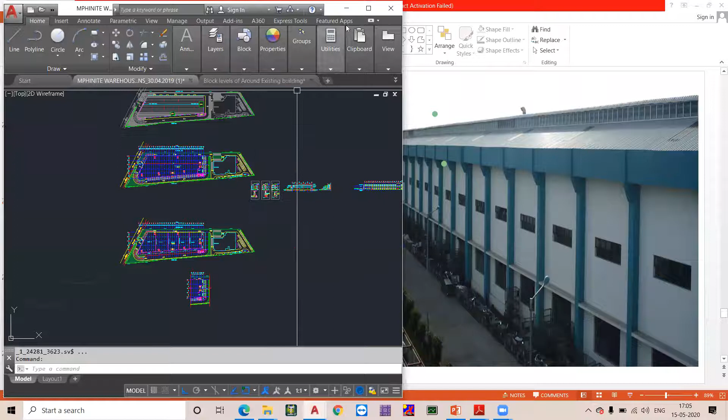And this is the floor plan. There is a KIADB road. This is an industry happening somewhere in the Bidadi industrial area, near Bidadi. Okay. And from the KIADB road, you are taking access to the entry gate of the property. You will be having 2 ramps dedicated for entry and exit. And this will be the space in the ground floor where you will be having n number of activities inside for the purpose of industrial usage.

And usually in the industrial buildings, guys, ground floor will be predominantly used for machineries if they are supposed to use them, and also for the purpose of warehousing, and for any office space kind of thing they will be going for the mezzanine kind of level. See there, this being the section in this architectural plan, this being the ground floor. The ground floor of all industries will be predominantly used for machineries, also for the purpose of warehousing, depending upon their requirement.

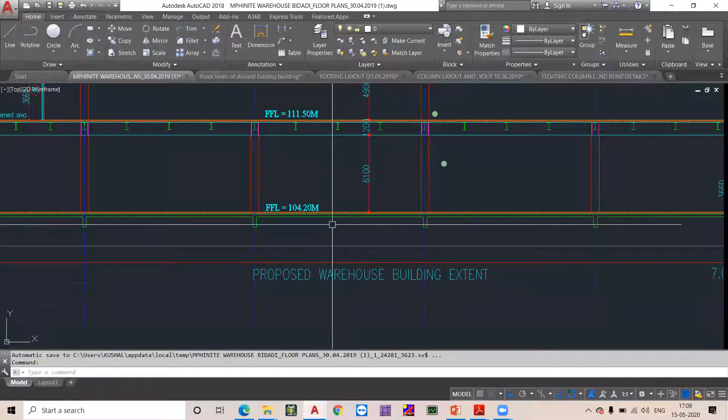Whereas the office spaces will be located in the mezzanine level, in the upper levels, because of resting or supporting heavier loading in the suspended system. Here in the upper levels, you will not be having any soil underneath to substantially sustain or support this slab. If it were the case on the ground floor, beneath the ground floor there will be well compacted earth. Having said that, it will be much easier to support heavier loads with this supporting system. Hence, in most of the industries, the ground floors will be predominantly used for machineries or for warehousing.

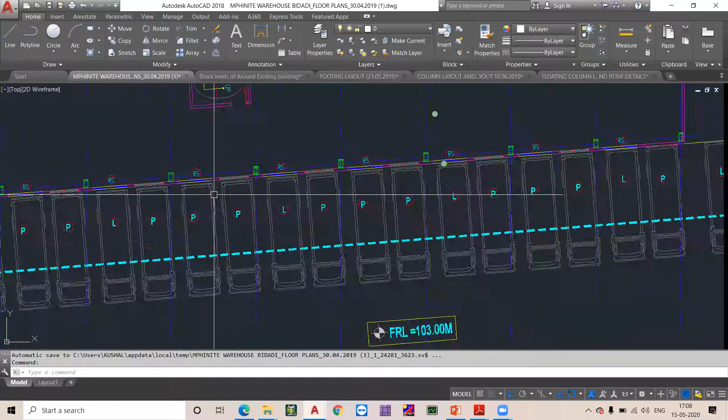Having said that, machineries and warehousing will come with very heavy loads, and it has to be transported in and out with the help of heavy trucks. Okay. And guys, you will be having an individual bay for each and every truck. This nomenclature called RS will be the abbreviation for rolling shutters. For this entire warehouse, this area will be termed as docking area, where loading and unloading of the raw materials or finished items from the industry will happen.

Both the raw materials that are coming into the industry will be unloaded here, and the finished goods from the industry will be again loaded back to the trucks. So this is how the arrangement will be, and this area will be termed as loading docks. Okay, and also you will be provisioning sufficient number of staircases and lifts for the vertical circulation system. And this being the activity in the ground floor, as we discussed, the office spaces for the industrial usage will be in the upper levels, dedicated for office works.

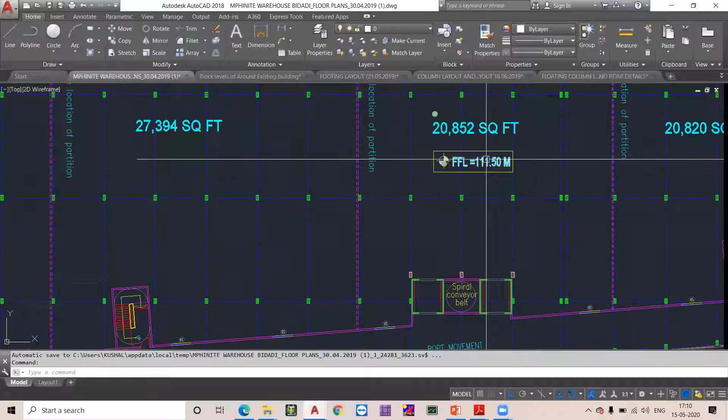Okay, guys, here we had a challenge that there was a lake very next to this property. Very next to this property there was an existing lake, and hence we will have to be retaining this portion of earth, and also this level being 106 meters at the entrance, we are raising the insides to 111.5, that is almost around 5.5 meters level is raised. The insides of this industry will be raised to a height of 5.5 meters, considering all the runoff issues and flood water collected during the entire year. They have considered to raise the insides to the level of 111.5 meters. Thereby you are filling the insides by 5.5 meters.

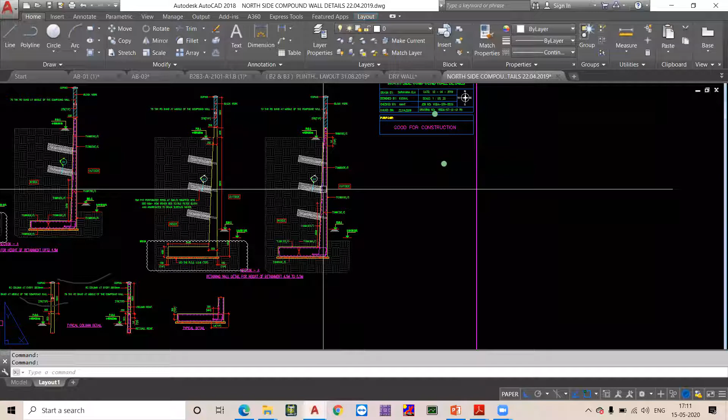Now that filling has to be retained. Okay, that soil has to be retained, and on the other side you are having an existing lake. This being the issue, we were supposed to design the retaining walls for supporting the compound wall to a height up to 5.5 meters. Okay, guys, this is a very massive retaining wall. So far, usually in the basements you will be having the floor to floor height of 3.6 meters, and that too there the situation will be such that there will be a slab of ground floor.

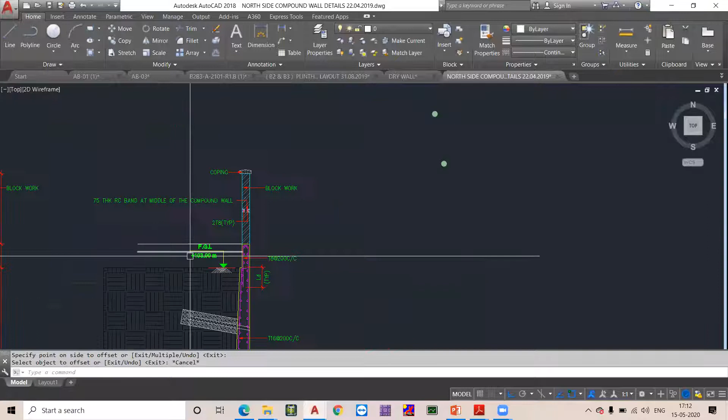In residential buildings, if you are accessing the basement for vehicular parking, then there will be a slab connected or tied to this retaining wall. Thereby the behavior will be a propped cantilever system.

But this retaining wall is being done in the periphery, at the property line edge of the plot area, in the plot line. Then this retaining wall will have no prop in the horizontal direction, and hence this is a pure cantilevered retaining wall spanning a height of 5.5 meters. So this is a very massive retaining wall we have employed in this project.

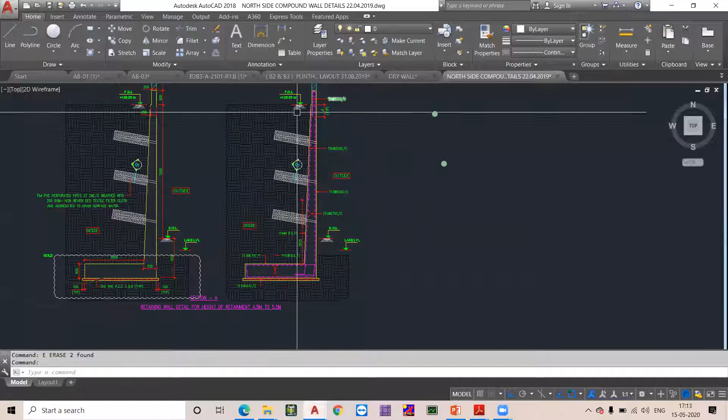And also, in order to reduce the loading, this side being the natural lake, we can drain out the groundwater that can be percolated inside with the help of provisions like weep holes. We will be provisioning a weep hole system through which the rainwater or any sort of water that can get percolated inside can be drained off into the outside lake.

Guys, having said that, we can only provision such weep holes towards this side just because we are having a lake. On this side there is a village, or it's the property of somebody else, and we cannot simply drain the water into his property. We cannot employ these everywhere. If this is somebody else's property, he will not accept me draining the rainwater into his property. So we cannot have the provision of weep holes everywhere.

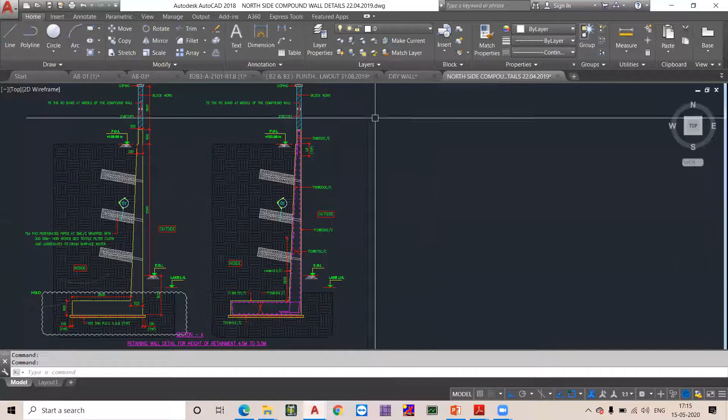The only luck here is that there is a natural lake, and hence we are draining out the percolated water into the natural lake. Thereby the density of earth will be much lesser than the saturated density, and you are reducing the loading on this retaining wall. So to take advantage and reduce the loading, we are provisioning the weep holes with a lake positioned outside. If this were somebody else's property, we would not be supposed to drain out the water through the provision of weep holes.

Moving forward, if this is a situation in a basement, how will it be? Outside of the basement there will be the filled up or natural soil. Inside you will be having car parks, driveways, some habitable areas. If you provide weep holes in basements, you are encouraging a threat. You are inviting the groundwater inside your basement, which is totally not desirable.

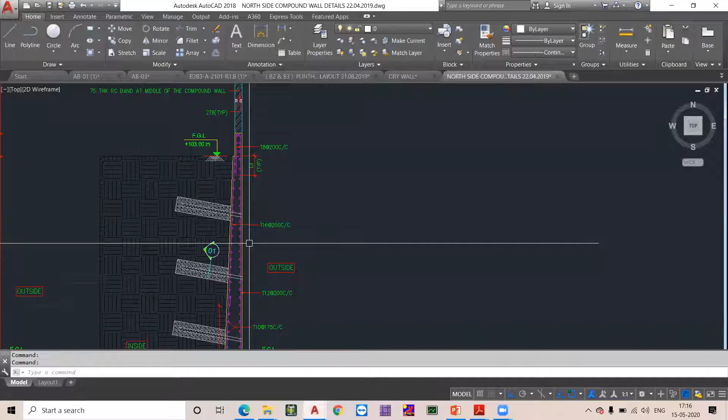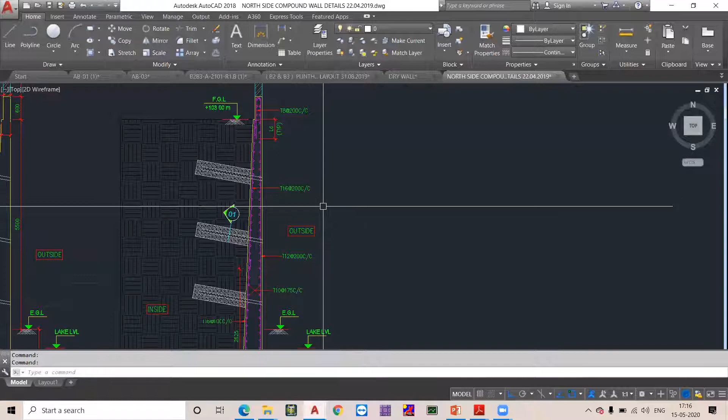So whenever you are making use of such weep holes, you will have to be very careful. If you make provision of weep holes in basements, it is as good as inviting the danger, inviting the outside water into your property, which is not at all desirable. And again, even if this is a property line retaining wall and instead of a lake you have somebody else's property, you cannot provision the weep holes and let in the water. This is one key issue I wanted to discuss with you guys.

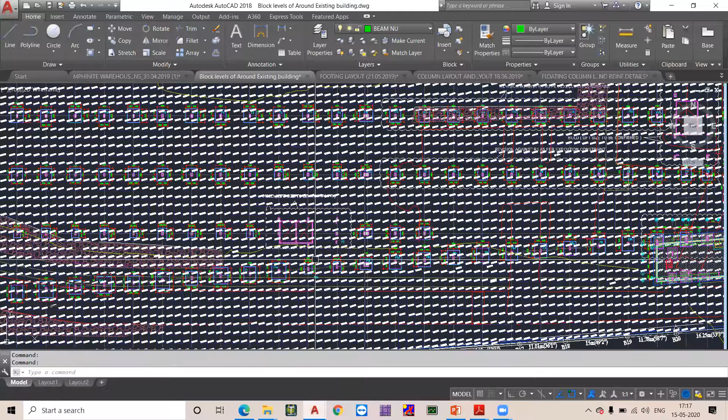Moving forward, the contour of this site is such that the existing ground level towards one end is 99.314 RL, whereas here it is 102.6. One side the level is 102.6, and towards the opposite end it is 99.3. On average we are having a 3.3 meter level difference in the topographical profile of this site. So this is the existing level of this property.

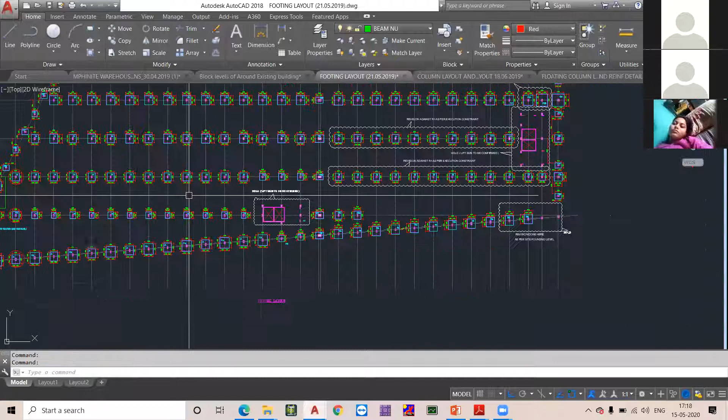Now the inside level you are looking at is 101.5 meters, so you are raising the inside very high. Moving forward, if you notice the footings of this project, even though the spans and loadings on each column are almost the same, as you go towards the depressed area of this property, there is an increase in footing area. This is a structural drawing, the footing layout for these columns.

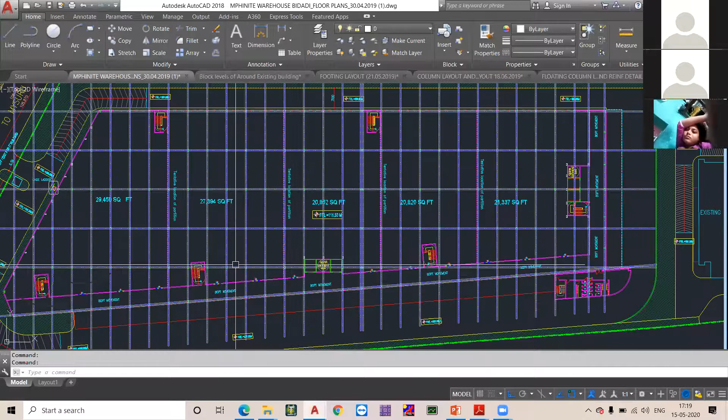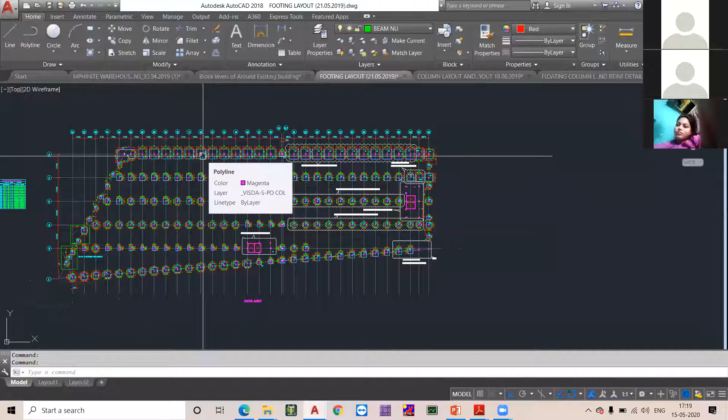These are all the columns, structural columns considered for supporting this structure. And you can notice the footing area is very high compared to the footing area at the other end, because there is a level difference of almost 3 meters from one end to the other end. Okay, and because of this level difference,

see, in structures like PEBs, okay, this is the steel drawing of the PEB, where the entire building will be made of structural steel, and all of these are positions of columns, structural columns. In structures like PEB, it is not a gravity governed structure. If it is the case of RCC, the structure will be governed by gravity. But since these are steel structures, lightweight structures, here it is not a gravity governed structure.

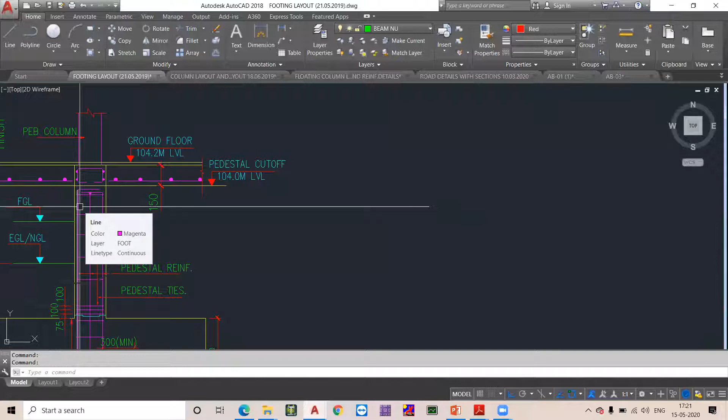That means the vertical load will be comparatively lesser with respect to an RCC building than your horizontal loads. Having said that, the horizontal loads at the base of the column are created because of the wind loading on the structure. In lightweight structures like steel structures, wind loading will be a very important criterion, because there will not be much activity on the roof. Since it is lightweight steel, it is not set for regular access. Only for maintenance activity will people be moving on the structure.

If you can notice, this is that section. You have steel columns, and this is your sloped roof at the top. This is the sloped roof, lightweight roof. Here, this is not a terrace. This is just a roof. This will not act as a floor. No access will be given for regular usage. The access will be only for maintenance activity. Okay. Hence, the live load on this roof will be very less.

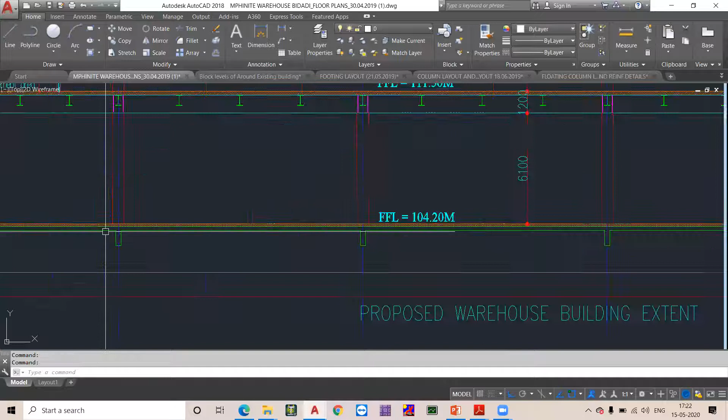With all of these parameters, the load transferred to the base of each column will be lesser compared to that of RCC. In addition to the live loads, there is a very huge reduction in the self weight of the structure too. The self weight of an RCC structure will be very massive, because the density of concrete is high, and the volume of concrete will also be high in RCC structures. But in steel structures, though the density is higher, the volume will be very less, and hence the self weight of the steel structure will be very less compared to that of RCC.

And also, since this is lightweight roofing, you will not be giving access, and no regular live load will be there on such steel structures. Adding it all together, the vertical load, the gravity load, will be very less in steel structures. But since this is a very light structure, it is prone to movement with the application of wind load, and hence you can notice there will be movement in the lateral direction of this structure. To arrest that lateral movement, a horizontal reaction force is generated.

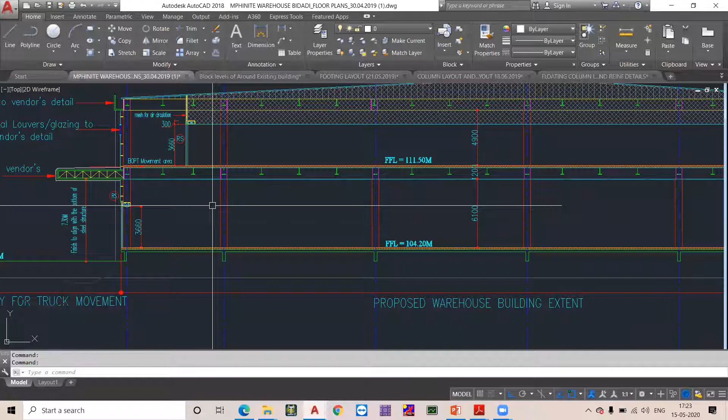If this had been a regular RCC case, the gravity of the structure itself would be so heavy that wind loading would not be a concern at all. The vertical loading itself would be so high that there wouldn't be any requirement of horizontal reaction generation at the base of the column. So we can expect a good amount of horizontal reaction in steel structures to arrest the lateral movement, compared to RCC structures. And hence, there will be generation of horizontal force in the steel column.

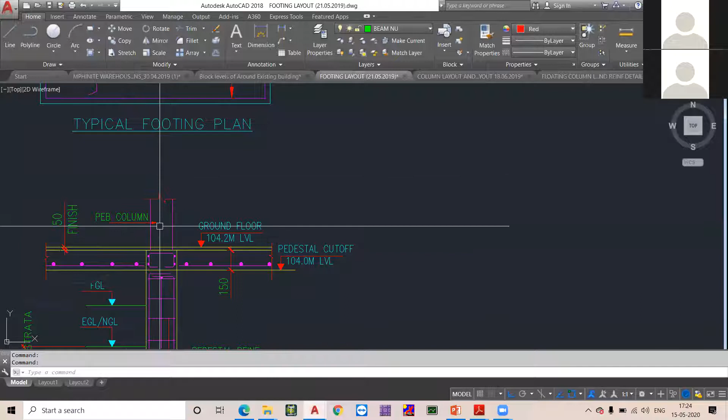This is the bottom of the steel column, whereas inside the soil, till it reaches the foundation, we will be providing an RCC column, which we also term a pedestal. The supporting system for this will be a regular RCC footing with RC columns or pedestals up to ground floor level, and above ground floor level it will be all steel columns, steel beams, steel roofing and such things. The lightweight structure will be above ground floor level, and below ground floor level it will be RCC.

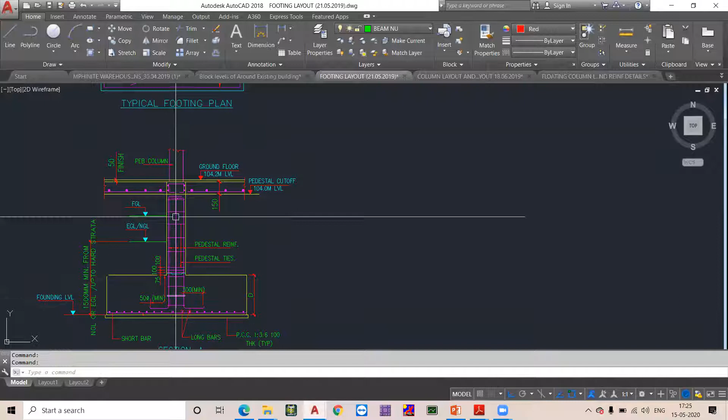Okay. At ground floor level the steel column starts, and the RCC pedestal or column stops. At this junction, we can anticipate the reaction developing for the steel columns in the horizontal direction to resist the horizontal movement anticipated due to wind loads. See, this horizontal reaction force, consider this as the wind load on the structure. And to counter this wind load, there will be an equal and opposite reaction developed in the base of this column.

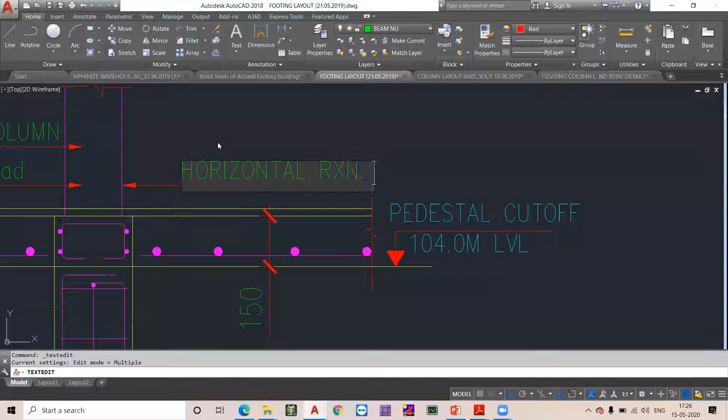This will be the horizontal reaction force that will be generated to counter the applied wind load. And this horizontal reaction multiplied by this dimension till the top of the footing, the product of this horizontal force with the top of the footing, we term it as a moment. This horizontal reaction force generates a moment at the bottom of your RCC column. Okay, and this moment has to be borne by this footing.

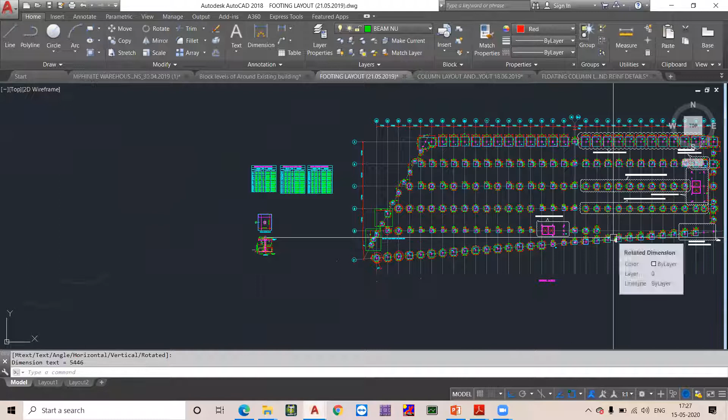See, in some places this dimension is just 3 meters or 2.5 meters in this grid. As you go towards grid A, the depth of founding level will be increasing, and from 3 meters it keeps on increasing to 5.5 meters. There, in these locations, the moment developed in this junction is horizontal force into 5.5. At the same time, in this grid, the moment developed is horizontal force into 2.5.

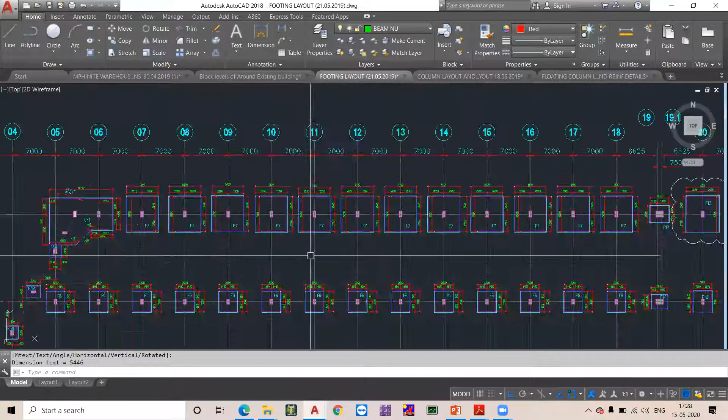So this is the reason why even after maintaining the same grids, the same center to center spacing of the columns, and same application of load, we can notice an increase in the footing dimensions. The reason behind that is the increase in the length of this lever arm.

Okay, this is one of the questions raised by the site team when I was handling this project, and hence to give you a fair idea: usually people at the site level will be technical persons, civil engineering graduates, but not necessarily structural engineers or structural designers. And this is how these designs will be done by the structural engineers. And this is the fundamental structural information they need to have at the site level, in case there is abnormal dimensioning.

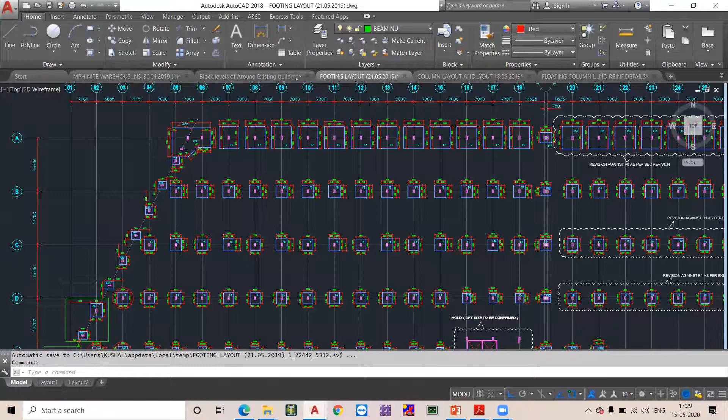See, sometimes, due to a drafting error, the draftsman may execute the drafting of this foundation dimension in grid A and the heavier foundation dimensions in grid F. Chances of drafting errors may happen. So in such scenarios, you should be in the position to identify that if the lever arm is increased, obviously the footing dimension should also increase. So these are some inputs the persons at the site level need to have when looking at the foundation drawing of industrial buildings.

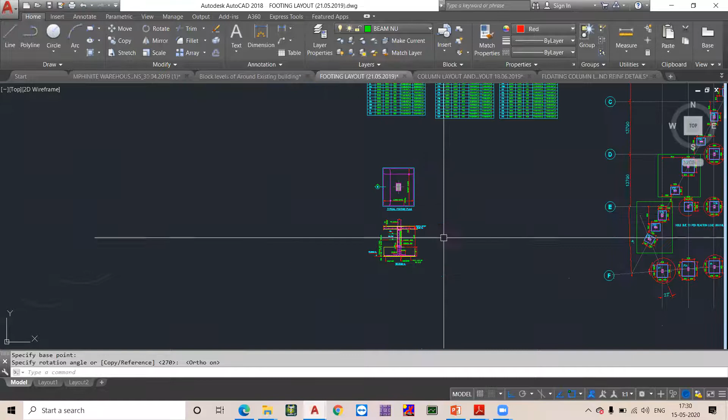And this inference you cannot make in regular residential or commercial buildings, where it will be mostly RCC. There, this horizontal force will not be a criterion, because in RCC structures, the major criterion will be your vertical force. In RCC structures, the gravity load is a very big criterion. This will be the gravity load. This will be the governing load in RCC structures, and the reaction will be opposite to it.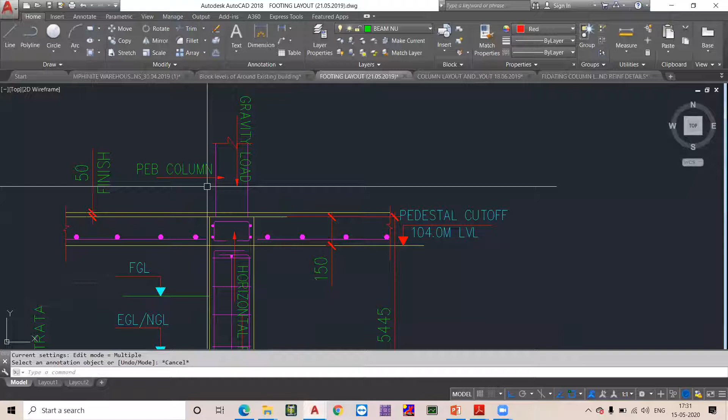But in steel structures, the governing load will be your wind, because they will be lightweight steel structures. In industrial structures, the governing load will be wind from the horizontal direction. Equal and opposite resistant forces will be generated, and that reaction force will be multiplied with a lever arm to dimension the footings. This inference can only be made in lightweight steel structures like industrial buildings.

Okay. And moving forward, we will be looking at the ground floor drawing. In industrial buildings, the ground floor will mostly be used for heavier machinery, warehousing, loading, and stocking of materials. And for catering to such heavy loads, you will have to prepare the ground floor with higher strength. Usually these floors are termed industrial floors by default. And you can notice this will be an RCC floor.

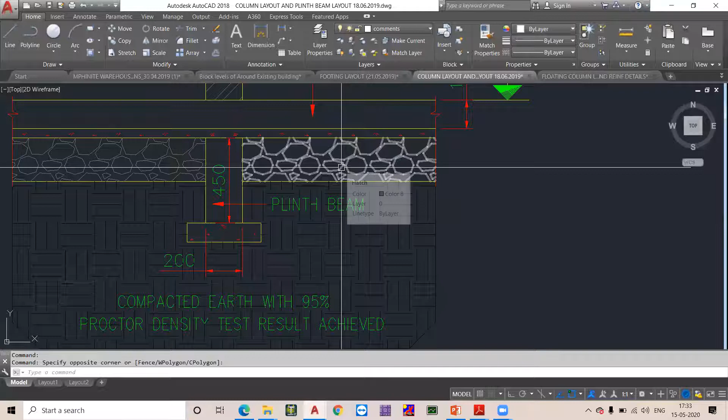Usually in our residences or any residential buildings, there need not be an RCC floor for the ground floor. If there is no basement and your ground floor rests directly on the earth, there is no necessity for RCC flooring. But this being an industrial floor, even with well compacted earth with a Proctor density test result achieving 95%, you will be providing a layer of 230 to 250 mm WBM, water bound macadam, or GSB layers, a sand cushion, for increasing the strength.

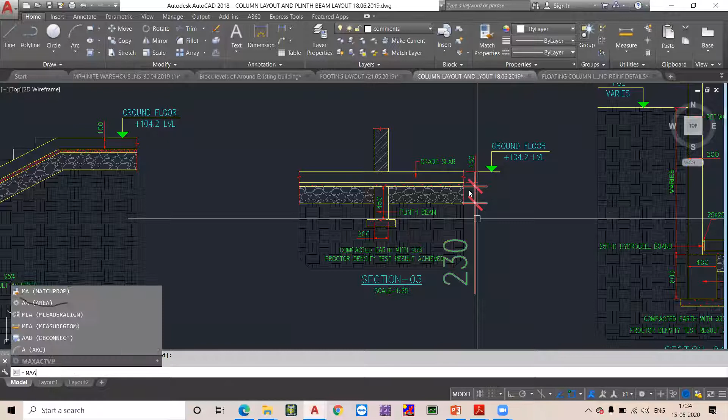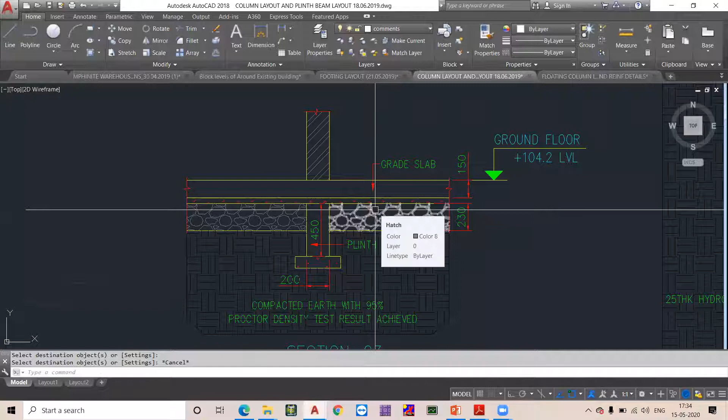You will be providing a layer of 230 or 250 mm, 230 mm thick. This will be water bound macadam or a GSB layer furnished above your well compacted earth, and after that, sometimes if you do not want to have a threat of water issues, you will be laying an addition of HDPE sheets, okay, high density polyethylene sheets, that will check the percolation of groundwater. We can refer to this drawing for the detail of that.

Okay, see, even after doing a well compacted earth filling, you will be providing and laying granular base of 200, 230 or 250 depending upon the capacity you require, capacity of the machineries. See, these industrial ground floors will be designed and constructed for various capacities like 6 metric tons, 2 metric tons, 4 metric tons, that being the point load under the machinery.

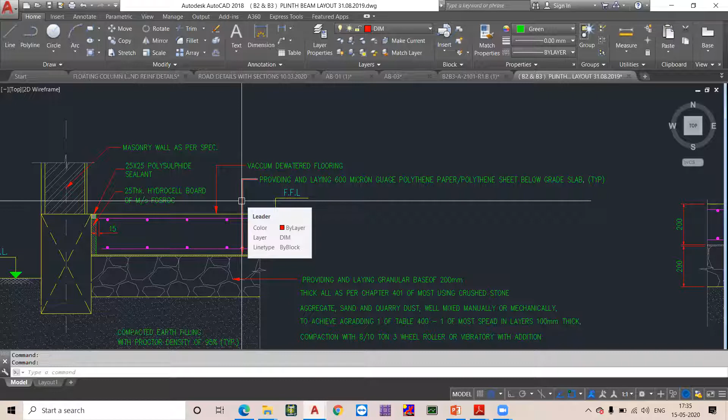See, if you consider a machinery, it will be having 4 legs, and below that is the contact surface of that leg with the ground floor. If there is a leg here, if this is a machinery, it is having 4 legs, 2 on this side, 2 on the opposite side. The contact surface will be only so much. Below this, the thickness should be capable of resisting that particular load.

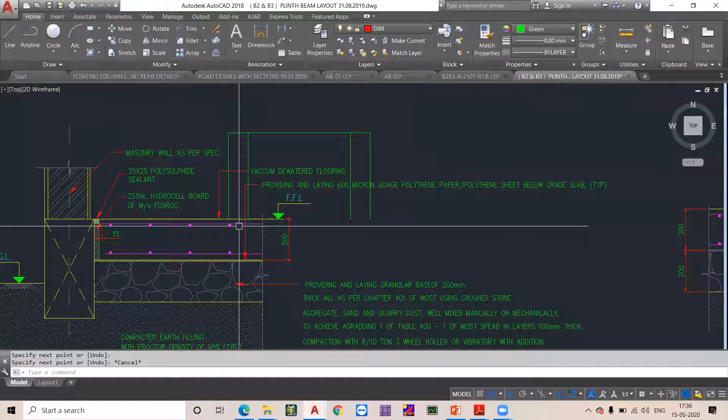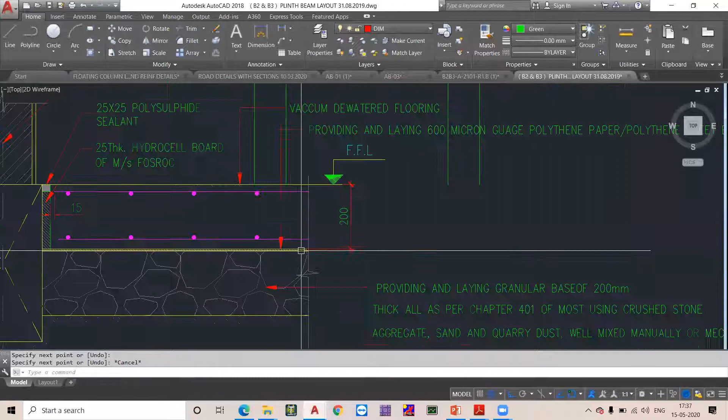This particular load may be varying from 2 metric tons minimum, and highest may be 12, 14 metric tons too. And accordingly, the thickness of this ground floor slab and the reinforcement, also the granular subbase, will be varying. And also there will be a provision for HDPE sheets. These will be waterproofing sheets. This will check or arrest any groundwater.

If at all there is a crack in this RCC floor, these HDPE sheets will not allow the water to percolate inside the granular subbase, and this will be of thickness 600 micron. 600 micron gauge polythene sheet will be placed above this granular subbase, and after that you will be laying the RCC flooring.

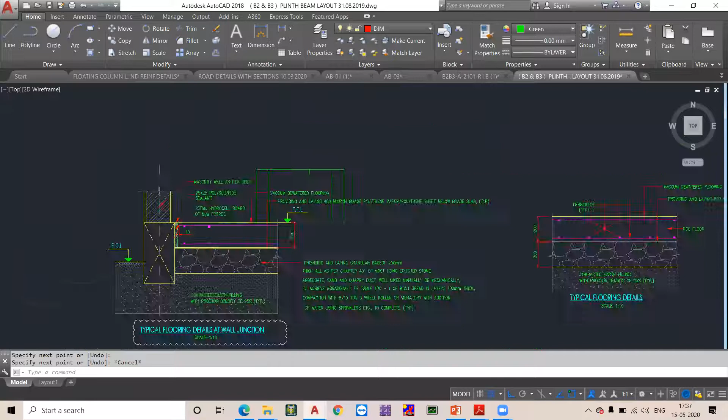Guys, also in the junctions of the steel columns, okay, you cannot continue the RCC in one single shot, and we will be looking at the sequencing of that. See, this being the entire RCC floor that we need to cast, this will be done in such a way that you will be casting it in bays. This particular panel will be done first. Next, RCC of this particular panel will be done. This will be done in panels. They do not concrete this entire area massively. They will be doing it in panels.

To begin with, they will start with this particular panel, and next they will be doing the RCC of this particular panel. Likewise, they will keep on executing the concreting, and all of these junctions are termed as construction joints, and this will be again saw cut with the help of machinery. It will be saw cut to arrest any development of further cracks. Okay, that is how the concreting of this particular floor will be done.

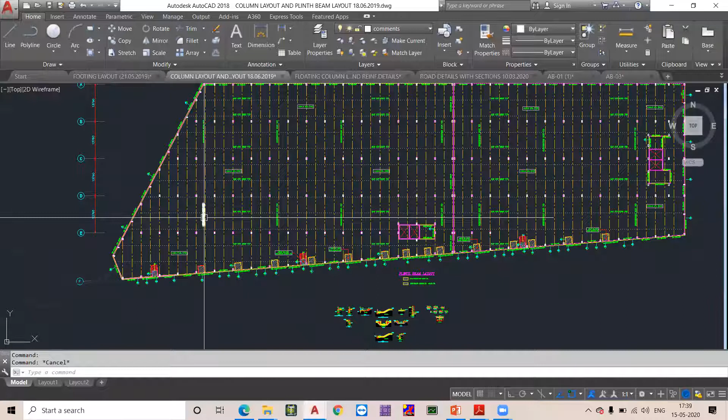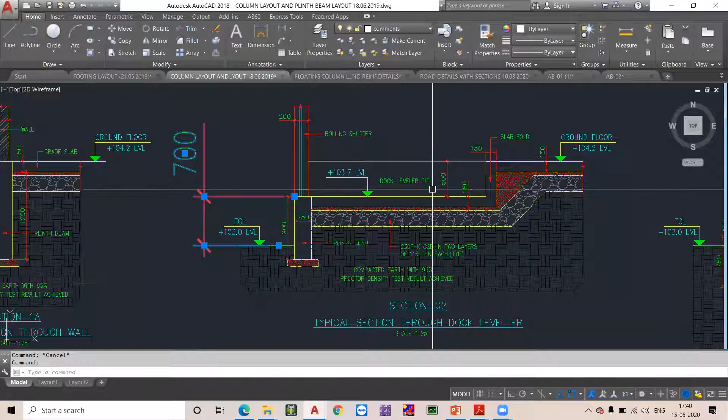Okay, and these are all termed as docks, where your truck will come and stand. See, this is how it will be. If you can notice in section 2, this is the dock level. The difference in height will be 700 mm, because once your truck stands in the backward direction here, from the tire bottom, from the finished ground level, the maximum clearance required for the trolley to open its back door and for the unloading of the material to happen is 700 mm.

Okay, and hence a minimum of 700 mm is maintained here. These materials from the truck will be taken in by lifting up this rolling shutter. Here there will be a rolling shutter. On opening it, you can access this truck that will be standing here.

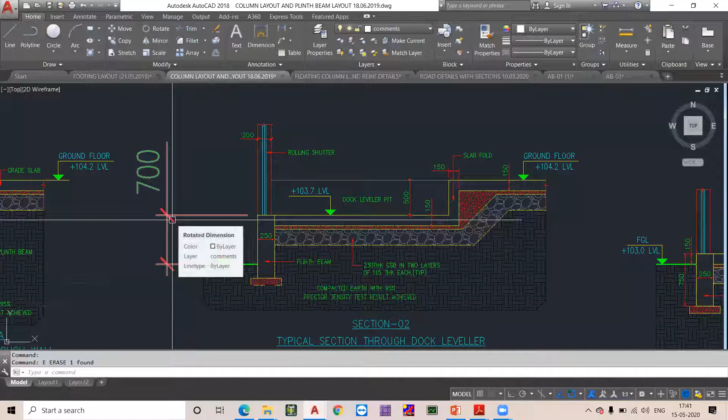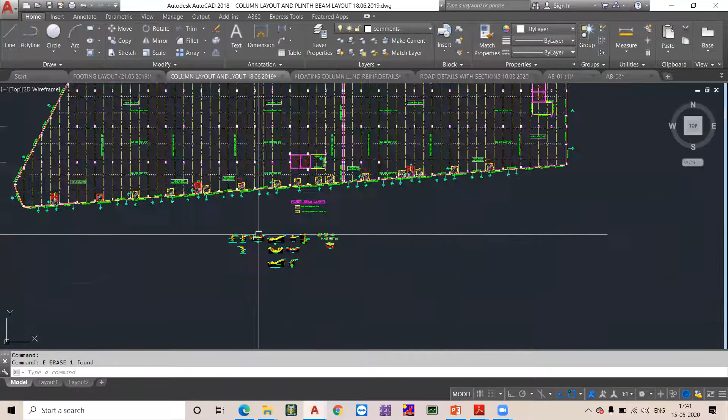You will be unloading the raw materials into this industry, and the finished products will be again loaded here in the same area. And hence this very bay made use for the loading and unloading will be termed as dock leveler pit. Okay, docking pit. This is one of the terminology they make use in the industrial buildings, where you will be provisioned with such pits, such bays for your trucks to load and unload your materials.

This is the fashion how the trucks will stand near the docker units, and having stood there, this is how the clearance is provided from the bottom of the tire till the trolley body. Okay, and this is how we will be doing with the ground flooring activity. Having said that, you can notice there are n number of partitioned walls provided here. For creating the bays, there are n number of partitioned walls.

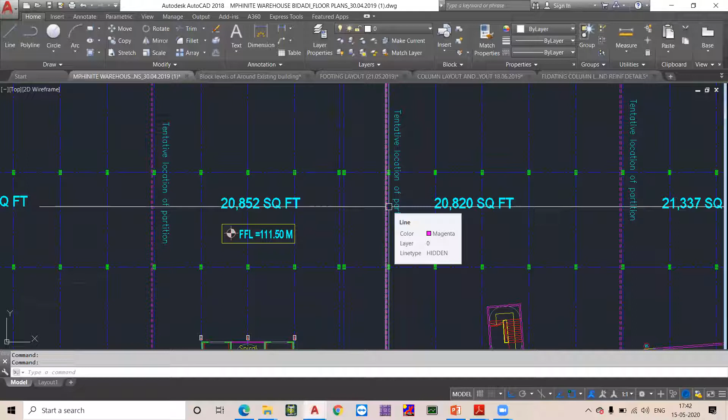Guys, execution of block work with regular blocks, cement mortars, then after that we'll be plastering it, curing. See, execution of such block works will be a very big issue in the industrial building. First and foremost is the many labors, and it is time consuming, and hence in industrial buildings we are opting a technology called drywall technology. Okay, these are all drywalls.

And you can notice, see, this is how they will be laying some channels, and to these channels they will be cladding the drywall panels, and they will complete one wall, and this requires no mortar. Whenever you do the system with the regular block work, cement blocks or mud blocks along with the mortar, it is a wet system, wet connection system. Here it is all dry connections.

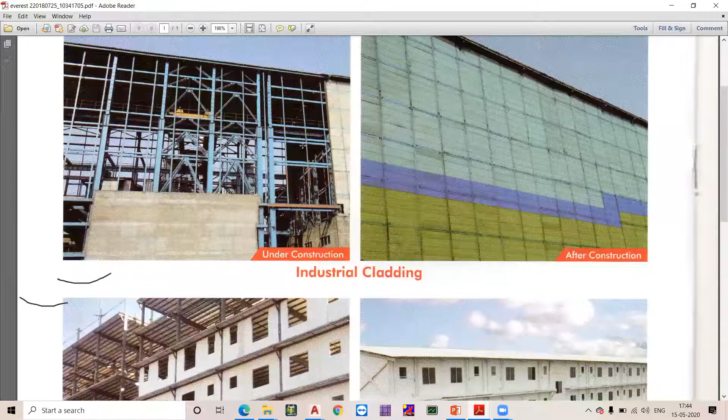You will be providing some aluminum or MS channels. To those channels you will be cladding these drywall panels to complete this wall. And you can notice these drywalls are employed both for the exterior and also for the interior walls. It's optional. And why do we employ this? Because to achieve the speed in construction.

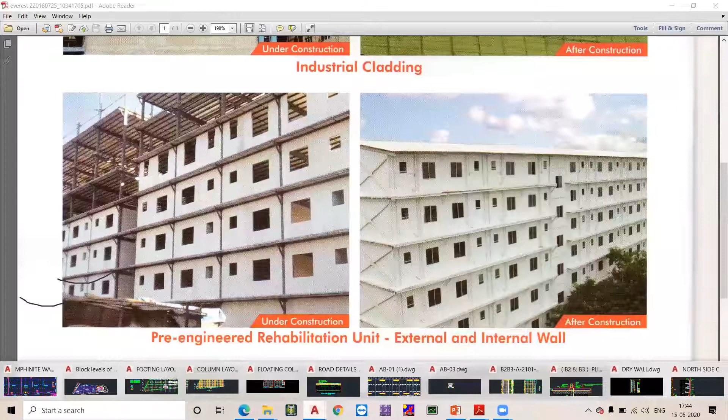And as per the statistics, the labor requirement for the execution of such drywalls is 50% lesser compared to the construction of regular block works, and the thickness of these drywalls will be very less. It will be maximum of 75 mm. So additional space will be available with the usage of such drywalls, and the costing also, it will be 10% lesser than the regular blockwork walls.

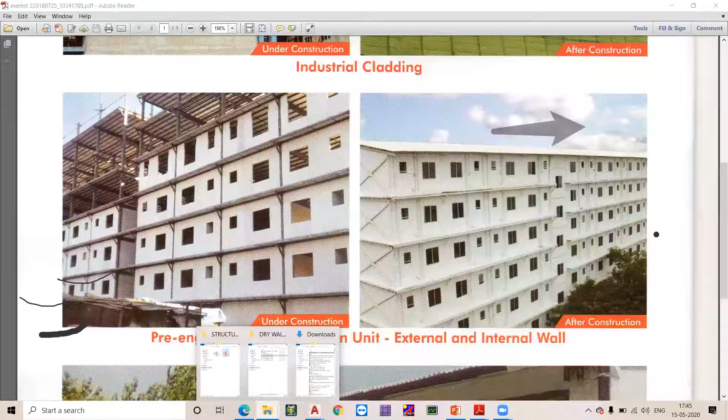Okay, and like any other regular blockwork, you will be applying putty and you will be doing the paint. The finish will be same. But what you will be doing here is you will be just applying these channels, and upon these channels you will be inserting your panels and you will be filling these joints with the help of putty powder or some filling material, and you will be painting this. It is as simple as raising the wall, and you need not require much labor.

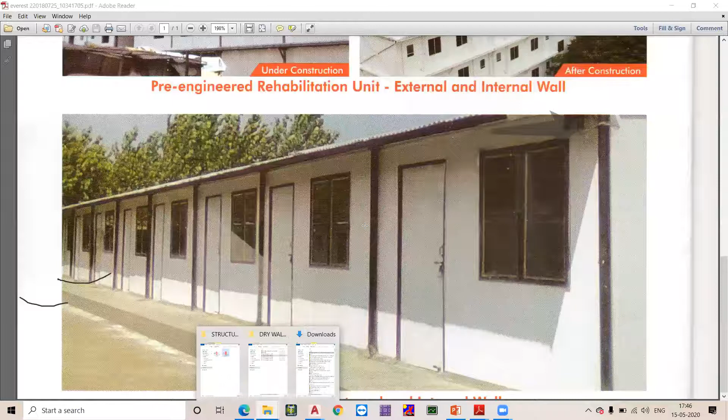Costing wise also it is 10% lesser, and you can execute it at very faster rate, say almost 4 times faster than your regular blockwork construction. Having said that, we are opting these pre-engineered buildings or steel material construction to achieve the speedy construction. And if you employ regular blockwork execution inside, then it will be of no use. And hence even the interiors will be done with the help of drywall methodologies.

All of these partitioned walls and sometimes the external walls also will be executed with the help of drywalls. These drywalls will also be having fire rating equivalent to your regular blockworks. So these are all the advantages of the usage of drywall system.

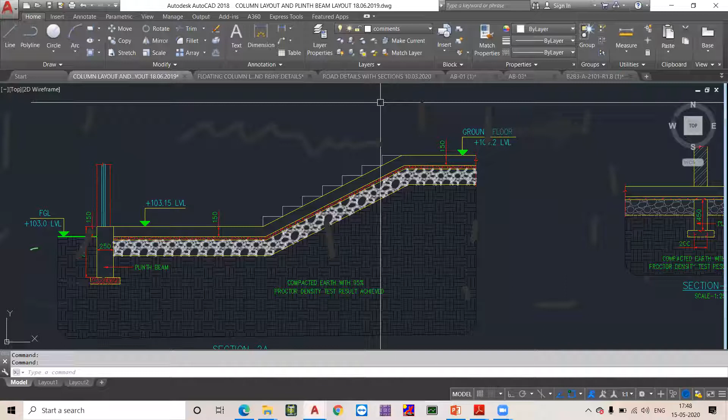Okay, and this is some of the idea that I wanted to discuss with you all with respect to the industrial buildings, where unlike the regular residential buildings or commercial or office buildings, the major usage of the ground floor of the industrial building will be for the machinery usages or for the warehousing. And hence, unlike in the regular residential or public buildings, the ground floor, even after it is rested on the mother earth, it will be of RCC with sufficient additives, like there will be a GSB layer, and also, wait, I'll be again looking at that.

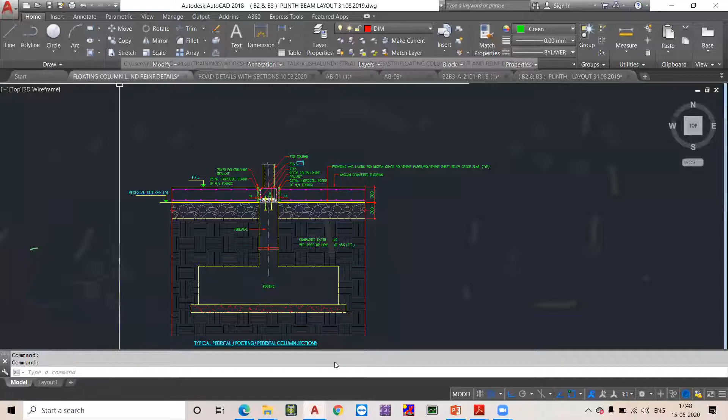This is how the ground floor of your industry will be, because this will be employed for heavier machinery loadings, as well as for the stocking of your warehouse activity. And hence, unlike any other building, an industrial building will be different with respect to its ground floor. As well, since it is a lightweight structure, a PEB structure, you can have this change in the footing layout. Just because there is a difference in the contour levels, you can notice the change in this footing level.

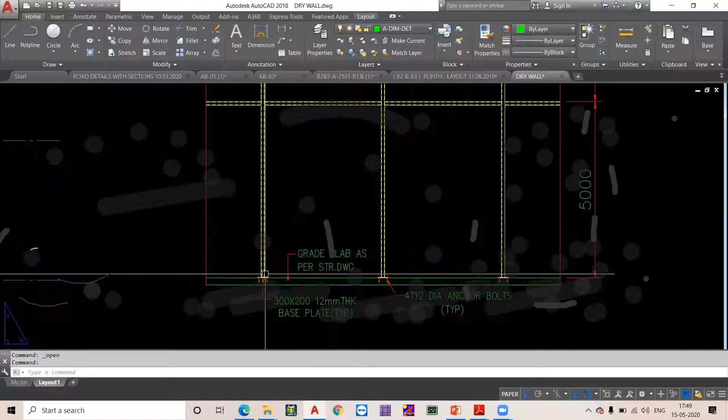And also the internal blockworks or walls, internal and external both, can be executed with the help of a drywall system. This is the typical supporting of how the drywall system will be done. These are the vertical channels used for the cladding of drywalls. This will be directly connected to the grade slab, the ground floor slab. That steel channel will be directly connected to the ground floor slab at regular intervals, and also there will be horizontal members.

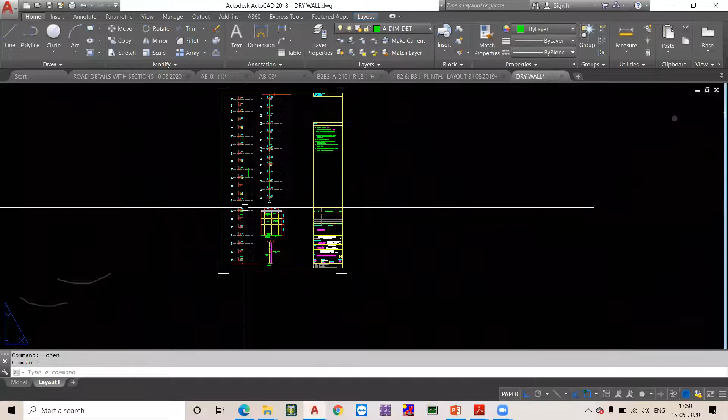To this panel you have created, you will be cladding your drywall panels. This is how the drywalls will be executed, and this will be executed at a very fast rate with very little labor requirement, and also 10% cheaper than regular block work executions. Okay, these are some basic differences I wanted to discuss with you in industrial buildings.

This is the industrial building plan of a different project, where you can notice n number of machineries placed. Uniquely, this particular project is for an automobile industry, which will furnish seat belts, steerings, airbags, and such accessories to leading companies like Hyundai, Benz, such leading automobile companies. And for the purpose of testing, industrial buildings will also have provision for testing.

They will be doing a test called a sled test, where they will be running a track, a train track, upon which a man-made skeleton will be placed on a seat with a seat belt. They will be doing a crash test here. This trolley will be hitting this instrument at a very high speed, and after the impact of the crash, they will be checking the effectiveness of this seat belt.

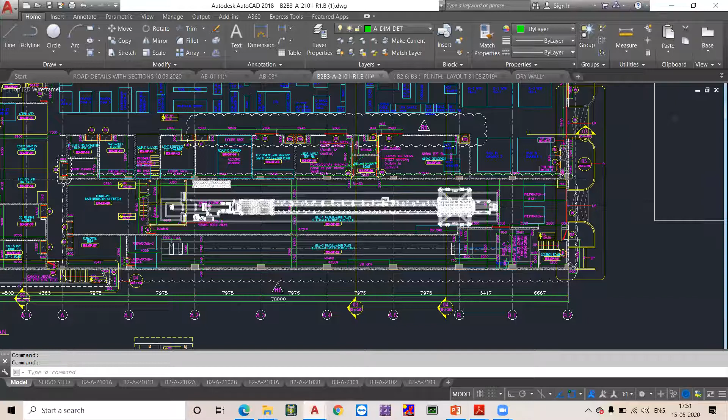For conducting such tests, they require some arrangement to be made inside, and we, being civil engineers, will have to provision all such facilities inside our infrastructure. For doing that, this is the ground floor drawing. We have created a track, we have created a slab here. This will be the trench or sled created for the running of those tracks, and this will be the impact junction. This is a massive concrete block which that trolley will come and impact, and we have to take care of all these loadings while designing, and it has to be executed that way at site level also.

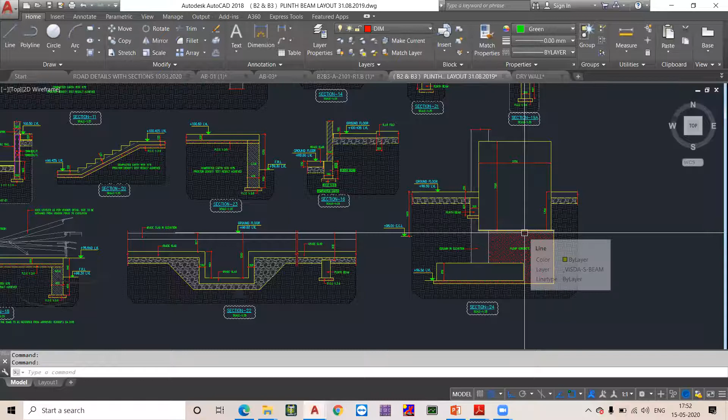So these are the differences you can notice in an industrial building when compared to regular residences, shopping malls, or corporate office spaces. This is how an industrial building will be built differently.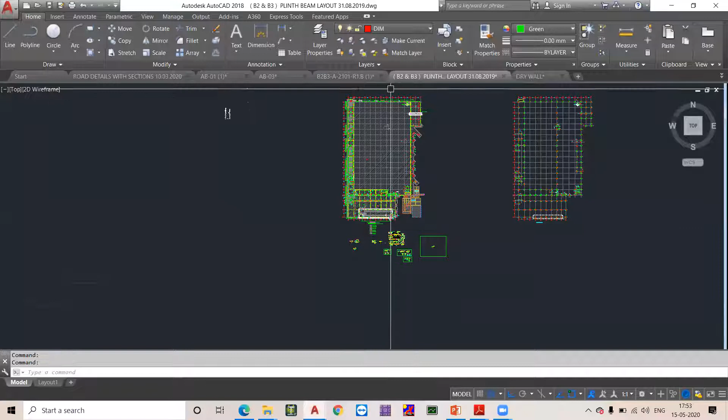With all these additional requirements in an industrial building, you need to complete such large infrastructure in a speedy way, and hence you will opt for pre-engineered building technology, where you will be executing things faster. Within say 1.5 years, you can completely finish the entire structure and hand over the building to your client. Whereas if the same activity had been done with conventional RCC, instead of 1.5 years, the time span would have been 2 to 3 years, minimum double. Even with more labor deployed, you could not have achieved it in less than 3 years. So this is the advantage of pre-engineered building techniques in industrial buildings.

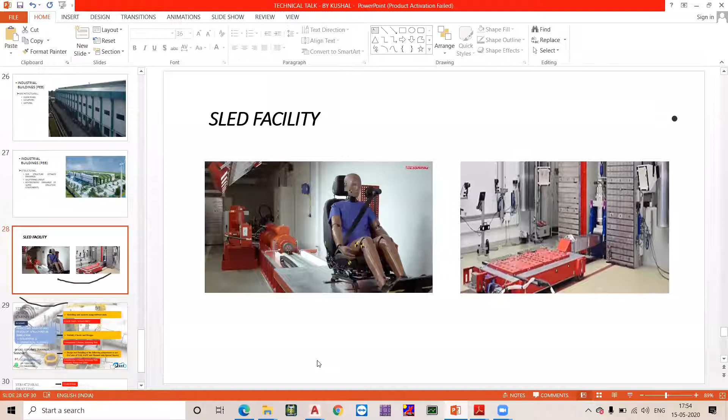This is some basic idea I wanted to give you all with respect to industrial buildings. Moving further, I am basically a structural engineer, a structural designer. So in continuation of this workshop, we will also be planning a course where we will look at the complete design of a structure right from foundation to terrace. First, we will analyze the structure by modeling it with ETABS, SAFE and STAAD, whichever software is required at that time. Then we will do the required stability checks. We will also design each and every element with the help of ETABS, SAFE, and also approach the manual techniques.

See, for that instance, how we will be doing is, we will be helping you guys to create drawings to this expert level. You will be able to design the complete foundation system for this complete project. You will be able to design all of these columns, and you will be able to design the entire beams and slabs in this project with the help of the software tool which we will be employing here, ETABS.

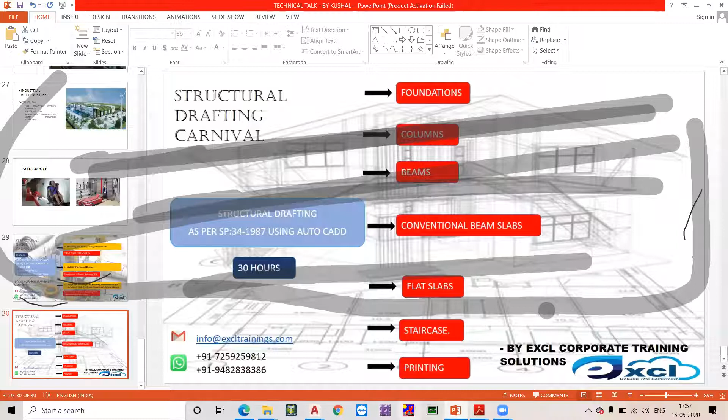With the help of ETABS, we will be first modeling in ETABS, then we will be analyzing the same in ETABS, and we will be designing all of these structural elements for this complete project, right from foundation till the floors, floor beams, floor slabs, etc. And this is one of the courses we have modulated. Continuing further, we have also planned for the drafting of the same using AutoCAD. After the completion of this course, you will be able to produce the drawings to this expertise level with the help of AutoCAD software.

So each course will be for 30 hours, and for this particular project, we will be completely modeling this project with the help of ETABS, and we will be analyzing the model. We will be designing the footings, the columns as well as floor beams and slabs. And after the complete design activity, the next course will be structural drafting, where you will be able to draft the footing layout, column layout, and beams, as well as slab detailing, and also staircase detailing.

Guys, just because you know how to draw in AutoCAD, people will not entertain you in the industry. If at all you have to be entertained in the industry, you will have to be skilled. You will have to be doing beam detailing or slab detailing, or footing layouts, column layouts. These are the skills they will be asking you in the industries, and you will be able to draw and design the entire structure after the completion of these two courses. And each course will be moduled for 30 hours.

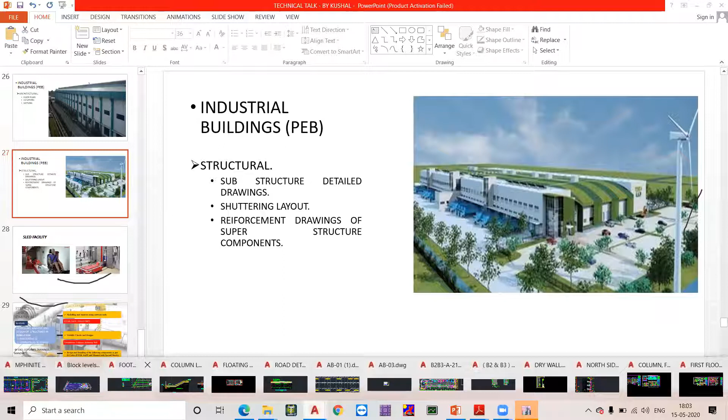Sir, in case of slope ground, do we place the footings at different levels or at the same RLs? See, that is, we will be considering. A 45-degree slope should be maintained between the bottom of the adjacent footings. If you are placing the footings in a sloped topographic profile, between each adjacent footing there must be a 45-degree slope maintained, just like this.

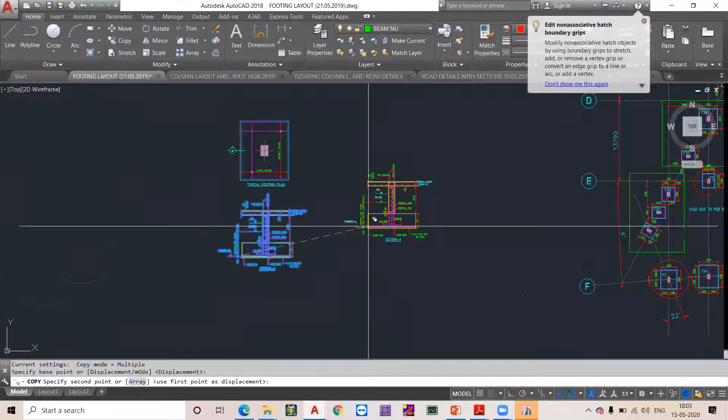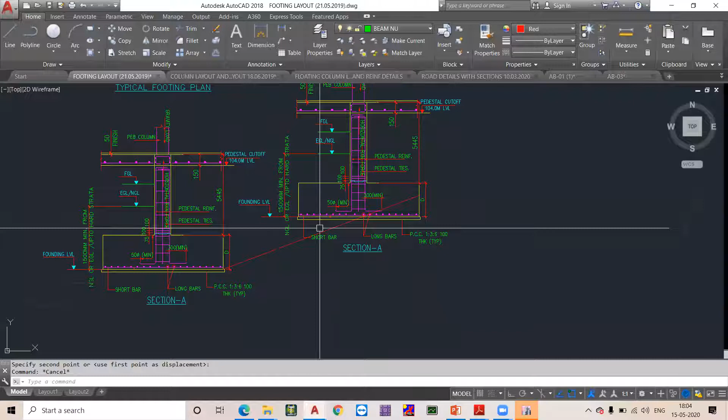If these are 2 adjacent footings placed one next to the other, but the profile is sloped, this is the scenario. The slope should be 45 degrees, a 1-in-1 slope. Only if this inclination is maintained can you still proceed with such slope footings. Otherwise, if this footing is very near, then it is not desirable to place it as a slope footing.

You will have to bring it down. If it is very near and you still cannot achieve this 45-degree slope, you will have to bring down this founding level exactly the same as the other. Okay, this is how we practice in regular day-to-day construction activity.

Okay, is it clear? Okay, sir. Yes, sir. Clear. Thank you. Any more doubts, guys?

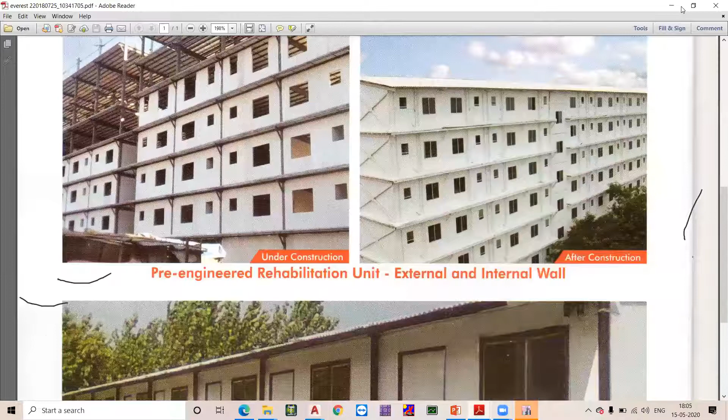See, there is a question from one of you: what will be the material of this drywall? There will be a specification given. I'll show you that drywall specification. It's a composite material, not made up of one single material, and I'll be texting you that specification from the vendor. I don't have it here now.

What about durability in the drywall system as compared to the normal system? Yes, the drywall system is as durable as the regular blockwork wall. You will not witness any cracks or dampness. It will be as good as your regular blockwork wall. And for the material it is made up of, I'll share the technical specification submitted by the vendors, and you can have a look at it.

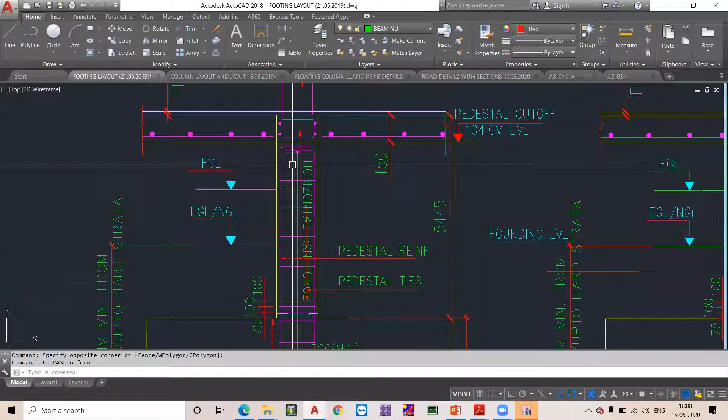Sir, you said that the steel column is placed above a pedestal. Correct. So is this pedestal also designed for the moment due to this lever arm? Yes. See, unlike regular framed buildings, where at ground floor level you will have plinth beams tying the columns, here these columns will not be tied. Only the columns at the periphery will have plinth beams. No internal columns will have any ties at ground floor level.

So the supporting system of this column will be purely cantilever. Along with this, it will experience the horizontal force at the edge of the cantilever span. This is a lot more critical and complex loading and supporting system. The moment generated at this junction due to this load will be calculated, and this column will be sized and reinforcement designed based on that critical moment.

Unlike the regular system, where the moments are fixed end moments because there is a tie with the help of the plinth beam, in these industrial buildings the pedestals will not be tied at the top level. They will be purely cantilevered columns with point loads acting at the edge of the cantilever span. The moment generated will be much higher, and these columns will be designed with reinforcement and sized with concrete to address those moments.